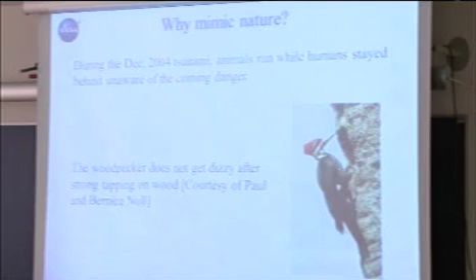Some animals have a sense that something is going on, that they better run to high places, and those survive. So we lost something—we may have had it, but we lost that sense, and we need to build sensors that could help us do what these animals are able to do. We lost something like 200,000 people at that time. Something simple like the woodpecker.

It knocks on wood. Try to knock your head on the wall and see what happens—you get dizzy, and this woodpecker does it for a living. That's how they get food, that's how they build their nest.

The people who hold the jackhammer, everything in their body shakes. If they have dentures that are loose, it flies from their mouth. The woodpecker doesn't have that problem.

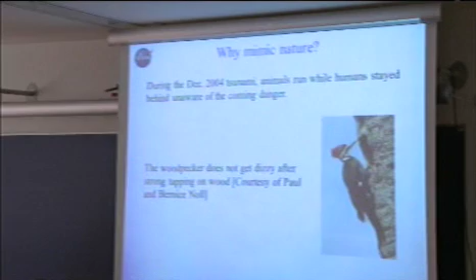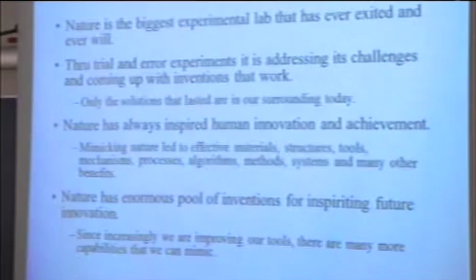So what made nature so capable? Well, it's the biggest lab that ever existed and ever exists, because there's a lot of trial and error, and only the things that work last and continue to other generations. Of course, it's inspired a lot of things, and this workshop is about that too. There is an incredible pool of invention that nature came up with—why reinvent the wheel? Just sit there, try to understand what it is, and try to copy it.

I'm sure we've seen a lot of examples even in this workshop, but as simple as the honeycomb—it's used in every airplane, not to store honey, but because it is a lightweight and strong structure.

Something else that was copied is body armor—look at the turtle. Of course, the turtle is very slow, and so does the knight with their clothing. But we did, as humans, take things and just improve them all the time.

And today we're using this technology, we call it technology, in a tank. Now they have GPS and all this technology we have, and make it comfortable to sit inside the tank and use it.

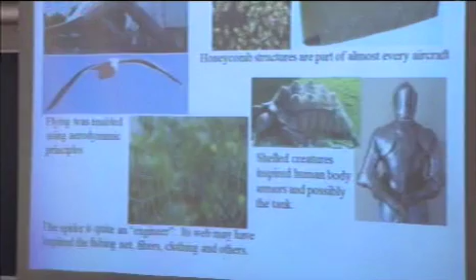And of course, flying—we as humans have seen a lot of insects flying, a lot of birds flying. Even though it seemed like it is so easy for them, it wasn't easy for humans, because people tried to copy that. Just copying didn't work until we did our homework. We learned all the tools and whatever, and now we can fly.

And we beat nature in no time. There's no bird that can fly this fast, no bird that can fly that high and carry this mass, and on and on and on.

And a simple engineer—we have this spider. It's marvelous, it built this web that is just incredibly flat, and you can just be impressed with what it can do.

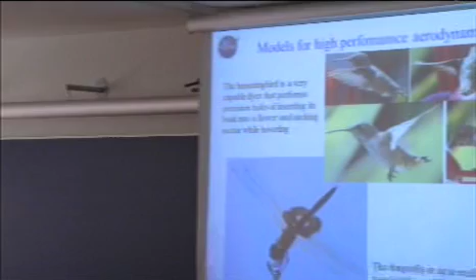Of course, there are a lot of other things that are good challenges—the performance of the hummingbird and the dragonfly, and there are people who are trying to copy it. There's a group not too far from our place in Pasadena that made a little hummingbird that can fly and send videos to a control station.

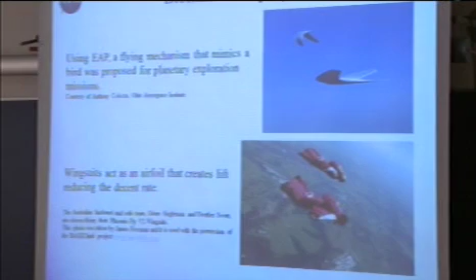But we also have other things we tried in terms of flying, in vision of using electroactive polymers, which is going to be some of the focus of my talk, using it to flap—basically create a plastic wing that flies on different planets.

And we have the thing called, basically it's an airfoil called a wingsuit, that people just jump from high places and, wherever they hit. But the early developers, none of them died old. And you can imagine why.

But look at what the octopus can do that you may be impressed by—what it is doing, you will not be able to do. Look what it did: it took its whole body, squeezed it into a narrow opening, a tube, and just got to the other side. There's nothing robotic with a solid structure that can do this trick.

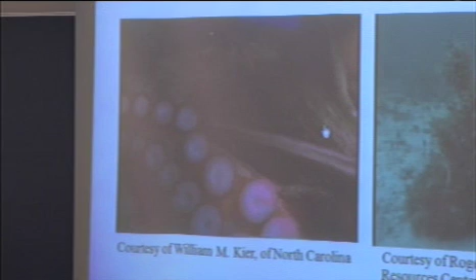There's another trick the octopus is able to do. There's an octopus in this picture, a huge octopus, and it's hidden so well because of its camouflage capability that you don't see it. Look what happened when it noticed that it was on camera. Look at that—if you were a fish, this would be your last day.

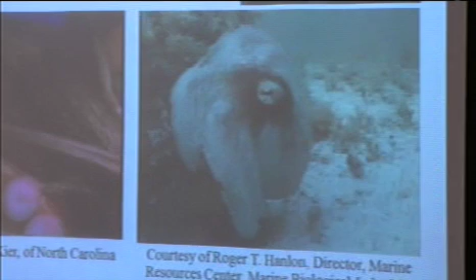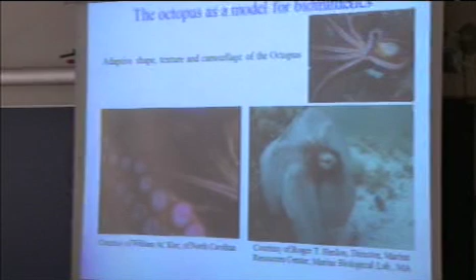And what is amazing about this creature, it is colorblind. It is able to copy everything - the color, the shape, the texture. I was trying to imagine to myself, if I had this capability, how could I tell even what is behind me? That alone, having all this resolution and all this capability, it's amazing. Now we're thinking of the chameleon and the octopus as capable of making this.

Ability to camouflage. Camouflage is used by nature almost everywhere, including plants. We don't think of plants as camouflaging. Let me show you what they do. I noticed, by the way, there's a book coming in two weeks that has this in the introduction chapter.

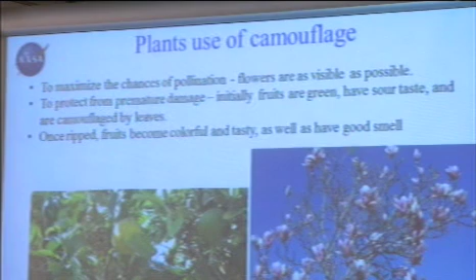I noticed I have a lemon tree. And what is interesting, the fruit stays a long time on the tree. Here I was taking a picture of the fruits, and here's what you notice. Look at what happened - this is the ripe fruit, right? We know the color code, and this is not. When it is green, you don't eat. When it is yellow, you eat. This is what nature coded its fruits.

Most fruits are green. And guess why? Simple - they don't want you to see it. It's too early. Once it's ready, they give it smell, they give it color, they give it everything it can, taste, whatever, so you will eat it, because it's ready.

Another thing interesting - it's important that the flower will be visible. Very important. So what it does, some trees shed the leaves, so the first thing that comes out is the flower, not the leaves. The flower comes out as big as it can be. This is magnolia in my front yard.

And once they are ready to become fruits, guess what happens? Those leaves are not needed anymore for the flowers, and now we have the real leaves. And then what is interesting, if you notice, most of those fruits are even hidden behind green leaves. You can see some of that. So camouflage is...

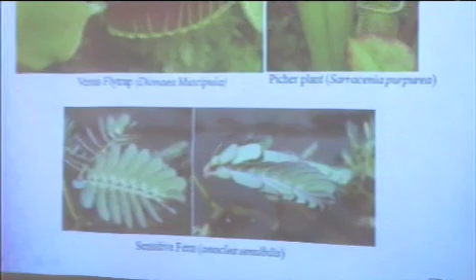Plants do other things too. We don't think of plants as even moving, but they have muscle-like capability. Some of these plants, like the Venus fly trap - a fly goes in, that's it, the door closes, and now it's food. There's also the pitcher plant, same thing - closed door, now food is ready. There is also the fern that when you touch the leaves, they close. It's quite fast, relatively speaking.

Roots of trees are powerful. They can lift curbs, they can lift building structures. This is how powerful they are. So we don't think of plants as capable of doing motion and generating forces here.

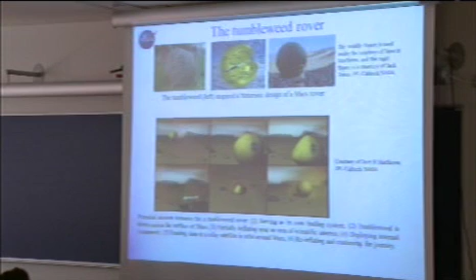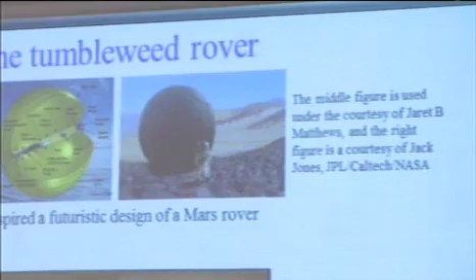And of course, this gives us ideas for biomimetics. The tumbleweed inspired a vehicle for Mars. The idea is to have something like a beach ball. There is a lot of wind on Mars. The atmosphere is not that high, so it is not that much force - you're talking about something like hundredths of our atmosphere, only 6 torr as opposed to 760. But the wind speed is about 24 kilometers per hour - decent, so it can move a beach ball like that.

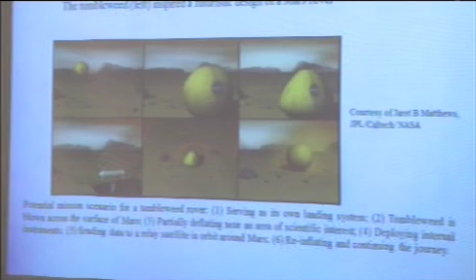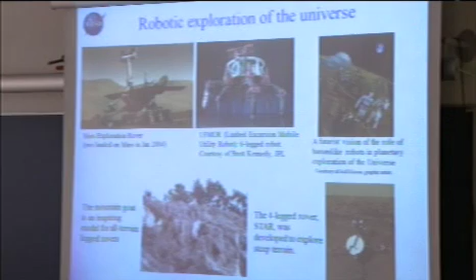More specifically, you're familiar with the Mars rover. We're going to send another one. The new one that's going to be launched in November is called MSL, Mars Science Lab - they may have another name by the time it is launched. It is as huge as a car, weighs about a ton. And when it arrives on Mars in March next year, it will be different than what you've seen before.

There will be a rocket that brings a lander close to the surface, and out of that, the rover will come down with cables, just like a spider. Once it hits the floor, the rover will be released, the cables will go away, and the lander will be launched away, as long as it's clear of where the rover is. Exciting, sounds like science fiction, but that's what it is. Hopefully in the future we'll have walking robots, because we are finding more and more areas like this as opposed to a nice flat area.

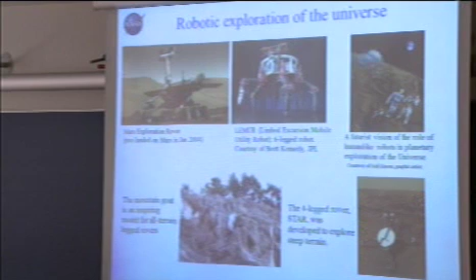We have one of the rovers that since 2003 got stuck in the dunes. I have an illustration where one wheel is outside the sand, the only one that doesn't work, while the rest dug itself into the soil, now so covered with sand it's not working anymore. But after 7 years, with a plan to use it only for 3 months, it's not bad.

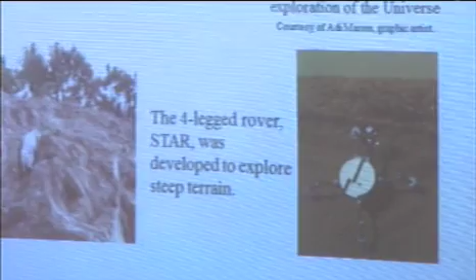But look at what these guys are doing, the mountain goat. This one is already resting up there enjoying the view, and this one is going to get there. We don't have a vehicle that can do this trick, but we're trying to make one. I'm working with another roboticist at JPL on this, and we made all the required foundations, including a drill that requires little force to push into rock, so it basically grips itself as it climbs mountains like that.

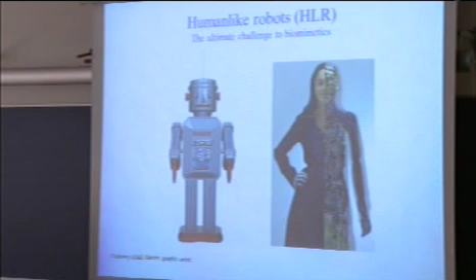That brings us closer to the subject of human-like robots, because it's the most sophisticated capability. When I was young, this used to be the robot we imagined, basically a machine that walked like a toy. Now we are more visionary. Adi Marom is the artist who made a lot of the art I'm going to show, part of a book I published in 2009. The idea is we will eventually have something looking like us that does things we do, or better. The question is, what does it take to make that?

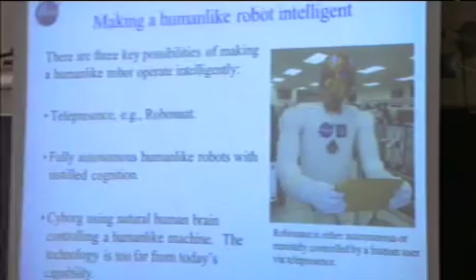We need some intelligence, and this is the robot Ira mentioned. I took this picture at Johnson Space Center. It's a duplicate of what we have now on the space station. This robot can sort mail, it takes an envelope and does it. It was built as a telepresence system, meaning an operator wears a suit with sensors, and the robot mimics the actions of the person. But now they're making it autonomous.

So effectively there are three possibilities for making a robot smart. One is to keep the intelligence with the human and make the robot totally dumb, just copying whatever the human does. The other is to make the robot totally autonomous and smart, but we are far from having our wisdom in it.

This now goes into the mode of becoming as smart as possible. Eventually, I don't know when, but this robot will be demonstrated, or at least tested, for plugging and unplugging things, simple for a human but a big deal for a robot. Turning knobs on and off, strapping and unstrapping, and a whole scenario of things that must work without damaging anything.

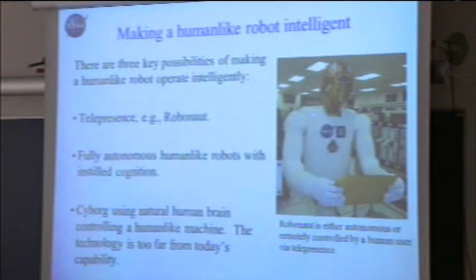And of course the ultimate is, if we start making prosthetics for humans, hands that look very much like a human hand, eventually there could be situations where someone with a deteriorating body but an able mind could have a whole body implant, where the brain is the only thing that represents the person. And now you have a totally smart robot because it has a human brain. Sounds like science fiction for now.

Now, why do we need to do that? What's wrong with a robot like R2-D2 from Star Wars, with a barrel shape and a half-sphere on top that turns like a head? What's wrong with that? We're very comfortable because most of our world is built around our size, the handles, where things are placed, the chairs we sit on. Everything around our world is built for our comfort and size, so might as well make a robot our size, so it will be effective.

Because if you want a robot for your grandma, getting old, who wants help but doesn't want to go to a nursing home, and wants to enjoy herself in her own home, it would be nice to have a robot like that.

Now, why does it have to speak like us? We're very comfortable with verbal communication and facial expressions, we understand that well. You don't want grandma to sit and type 'I want food,' and by the time she types it, she's starving, making mistakes the robot has to interpret. We want simple communication. Increasingly, interfacing with machines is made as simple as possible, like an iPhone, where with your fingers you can do exactly what you want, and it's expanded. Everything is more intuitive and as communicative as possible.

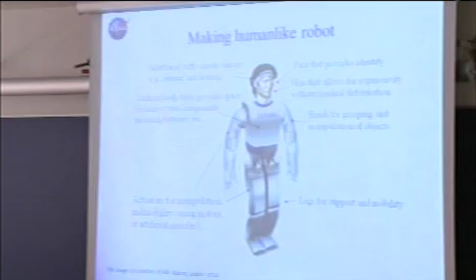That brings us to our days. In writing the book with David Hanson, who is also a roboticist, I came up with this idea of having a figure that represents a human-like robot. Because if I make it totally look human, it's hard to say, yeah, this is a robot. So we chose the body to look machine, and the head to look human.

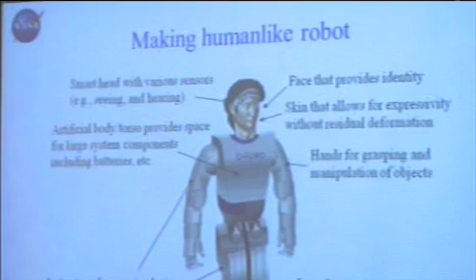You probably have seen this head before. It's David from the Michelangelo statue, that we turned a little bit in color so it will look human. But there is a lot of aspects to this, and this week we heard some, and you're going to hear more, about things that make a robot like that feasible, possible, and operational. I'm going to focus more on what it takes to make the muscles, which is really the weakness we have today. It's still not there, unfortunately.

Now, electroactive polymers that we call artificial muscles, their response, or characteristic of the response, is the closest to look like our muscles. The first person—I published a book in 2001 about that, and I was looking, you know, if you publish a book on the subject that's supposed to cover everything, I was looking to see the history of how did it happen.

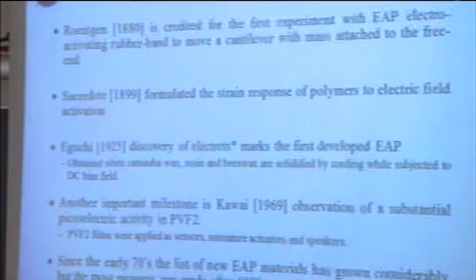And what I found was that Röntgen, the guy who came up with the X-ray, did one more thing that he just didn't know he did. He took a rubber band and hung a mass on it, clamped it with 2 electrodes, and he saw movement. But he didn't realize he was the first to do EAP. He thought it's a thermal effect, so he dropped it, but he reported it. He had a paper in German that he published here.

Then Sacerdote did some modeling, so he's the first theoretician who played with polymers. And then you can see that the milestones are 30 years later, 50 years later, and it's only in the 90s where things started moving significantly. The amazing thing to give credit for: in Japan, in the middle of the 80s to the 90s, they had a major program to look into this material. Most of the work they had done was with gel polymers, but everything was Japan only, kind of thing. The only spin-off that came out was some workshop—there was one workshop that included something like 20 people worldwide who knew about each other in the beginning of the 90s. Okay, but PVDF, which is well known, came in the end of almost 1970.

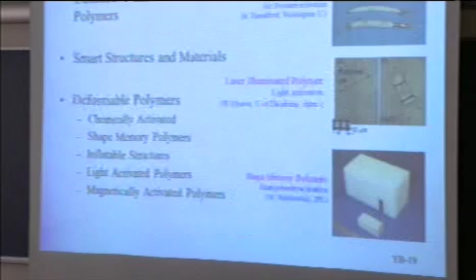Not everything is electroactive, not every polymer. There are others I should mention while we're talking. Some activity is not necessarily mechanical. There is photoactive, and there are also what we call smart structures, using shape memory alloys and other kinds of materials to create actuation of some sort.

Also, there are deformable polymers, like the McKibben muscle. It's just a balloon that inflates and has threaded cloth on it, so that when it expands, it shrinks in length, just like when we do like that. It's never been used in prosthetics because it's too noisy and slow, since it requires pumping air in and out.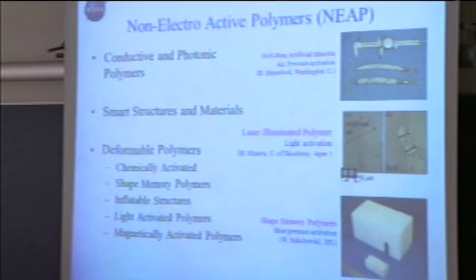There's work using laser activation, but that's on a small scale where you shine a laser and it should contract or expand. There are also polymers called shape memory, where you squeeze a polymer under heat and pressure, and then when you heat it again it expands, and it can grow something like 40 times the size because of its foamy structure.

That brings us to the EAP. I'm an expert in ultrasonics, and at some point in the early 90s, I decided, why don't I expand beyond ultrasonics? I started looking into ideas in smart structures, and a chemist in my building came to me, and I saw an article about...

So I wrote a proposal to NASA to develop artificial muscles. I got the money, $1 million over 3 years. Sure enough, we started working, and it turned out they had made a big mistake, a 10 to the minus 5 order of magnitude mistake.

Nothing moved. I worked with top-notch chemists from NASA Langley who could not reproduce the results. I tried to contact the original researchers to find out, am I wrong or are they wrong? I found out they were wrong. They realized it too, but they didn't want to admit it, and it was very difficult to reach them.

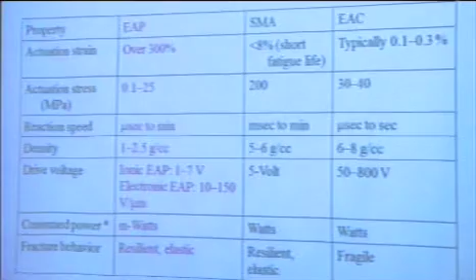Shape memory materials generate high strain of 8%, but you don't want to use that, because if you take a metal and bend it, it breaks in no time, so they try to keep them below 4%. The last one is the electroactive ceramic—those are not so friendly to strain, so they're used in the range you see. Some reach closer to 1%, but the majority are below that.

In terms of force, this one has the highest force, this is the lowest, and sub-medium level. So you have the numbers, you can see them.

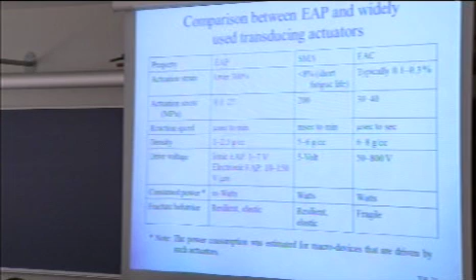What is exciting about these polymer materials is that they are lightweight. For space, it's important because we're trying to save mass—the heavier something, the more energy it takes to bring it to space. And of course, the bigger thing about them is that they are resilient—you can do things like what I'm doing with my hand, freely moving.

Some more accurate or detailed numbers you can see here. I'm not going to go over the details in this short time—you can find it in the literature. But let's see how it looks like when it moves.

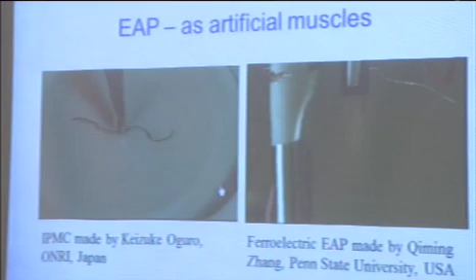Here's an example—this specific one is IPMC. Everything is immersed in water, and you see it moving, and it looks alive. This is, of course, not a tweezer—these are electrodes holding it. And this is like a starfish. It looks alive—find me another material that does that.

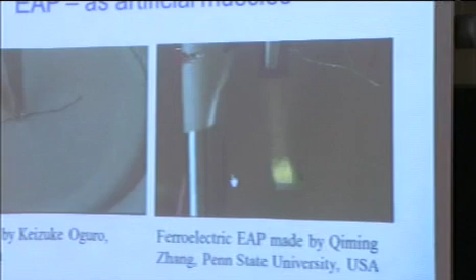The next one next to it is a ferroelectric EAP, basically like a piezo. The way it was made to bend like that is to use what we call a bimorph—taking a film that is active and bonding it to a passive one, so when one stretches, it creates a bending effect. Otherwise it just... Now, most of the ionic type are made to bend, as opposed to the ones we call the electronic ones.

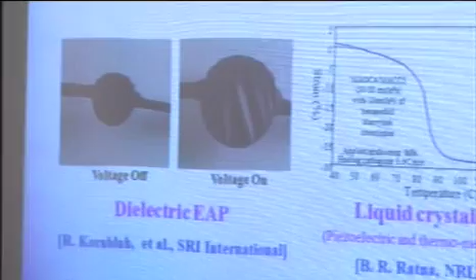Here are some examples of those, and if you remember, I mentioned what SRI have done—this is what they have done, see it in action, it's really impressive. Here is another example—someone from Korea even took those tapes that have metal on one side, glued two of them so the metal served as an electrode, and showed that they have an electroactive effect to some extent.

The EAPs we are seeing here, or at least the electronic ones, all of them stretch. The contraction is in the thickness, because you need as thin a material as possible so you can get the electric field that is needed.

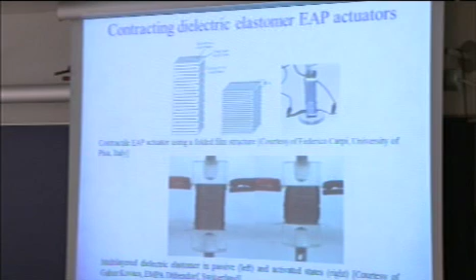So in order to get contraction, different people came up with different ideas. One is Federico—he spoke here last week—he came up with the idea of folding a set of strips to create contraction, because the thickness contracts. And someone from a group in Switzerland, from EMPA—Gabor is one of the lead researchers there—they just took thin films and created a stack, which those familiar with piezo will recognize, that's what they do in piezoelectric material. They create stacks.

As opposed to piezos, where it's much easier to create those thin films uniformly, this is much harder. They're trying to make a machine that will produce this uniformly, and they're still having issues.

But I've seen a demonstration. It's impressive that it's able to contract and lift significant mass.

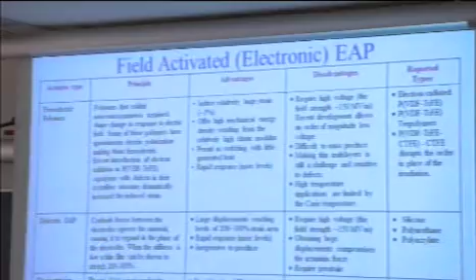I'm not going to go through all the details, but as you can imagine, we don't have one winner material that has everything and is perfect. Everything has advantages and disadvantages, and we need to know the principles. So when I say EAP, it's not just one material—we have to be specific about what it is. But having disadvantages is not a disaster.

It's important to know, if you're an engineer, if you don't know the disadvantages, you design and you will fail because you didn't know.

Here's an example: electricity. If you take a nail and stick it into one of the plugs, one of them will kill you. That doesn't make it bad. If you are careful, if you know how to avoid it and take all the safety precautions needed, and you don't do something stupid like that, then you enjoy all these things that electricity gives us.

Same thing about EAP. Some of them, if you prepare them—this is chemistry—when you prepare them, you have to be careful and take it into account. So you need to know the disadvantages.

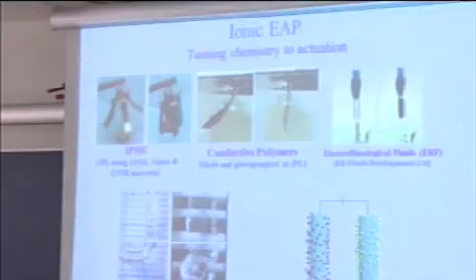I'm going to show a summary of those tables. This is just intended to show that there is a lot of information about it. And here is the ionic polymer—again, a whole list. But just in summary, so you'll have an idea of what kind of advantages.

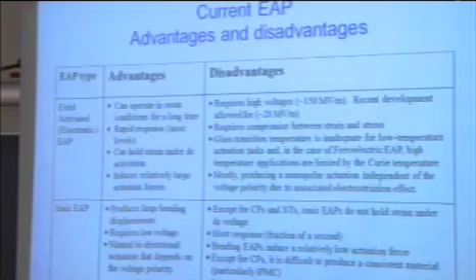So what we call the electronic or electric field activated EAPs, the advantage is they operate dry. You don't have to worry about operating them in room temperature, in room conditions. They are fast—faster than the ionic ones. They operate up to 1 kilohertz.

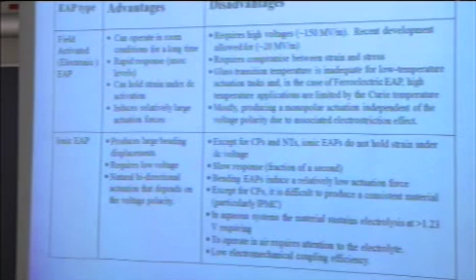This is important for robotics. If I put the position like that, I don't have to feed it with power—it stays there, okay? And it creates large force. So if you need large force, this is the way to go.

However, there are issues. The voltage is high, and there is no magic around it. Maybe the idea—that's what EMPA is trying to do by using thin layers. This way, that's how you reduce the voltage. And that's what they do in piezo, as I mentioned.

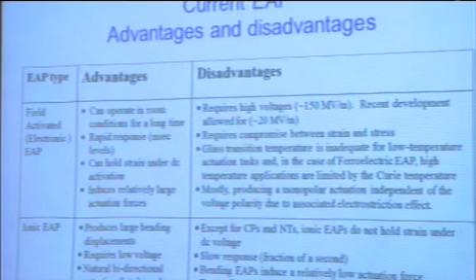They require a compromise of force and strain. If you have high strain, you compromise to get more force and so on, so you can balance. Glass transition is an issue when you go to low temperatures, and it's a problem with all polymers. At low temperatures, it's an issue.

They mostly produce—this is also an issue, but you could deal with it—one polarity, because it's related to the voltage squared. So no matter what voltage you use, it always bends in the same direction. So it's something you need to take into account.

The ionic ones create mostly bending displacement. They don't have that much torque or bending force.

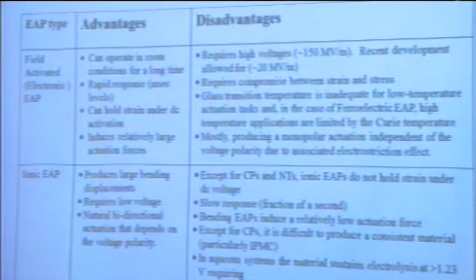The advantage is it requires low voltage, something at 1 volt. You can drive them with a simple battery, and they are bidirectional. But the weaknesses are: most of them do not hold position.

This is chemistry in action. DC creates movement of ions, so they keep moving. You put it under DC and they can do things like fold on themselves and so on. Slow response—the bending is low force.

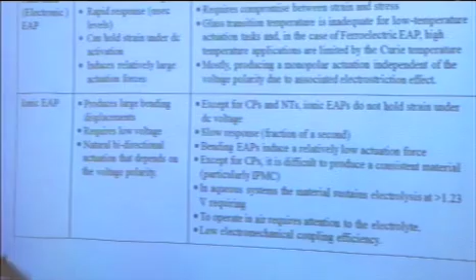And operating in air is a big deal—they dry out in air. When I started working with it, I used to get material from New Mexico, and at one time I went to show it as a demo at a review, an internal review at JPL.

It worked when I left the lab. Trying to check it before I was supposed to make the presentation, it doesn't move. At that time, I realized I have to take that into account, and I didn't think about it. I'm not a chemist—you give a material, you think of it as a mechanical device. So that's what happened. Anyway, the efficiency is also low.

Okay, some examples.

Once I got the funding, once I had this contract, it's important to have something useful when you bring chemistry, and I was funded by NASA's robotics program, so you have to show something robotic. If you tell them that you mix this with this, no one gives a damn.

So I came up with an idea of making a windshield wiper, because there was a tiny rover that was supposed to land on an asteroid. The idea was to throw a detonator onto that body, and all the dust would fly, so when the rover lands, it will be a pristine surface, never exposed to UV and all these bad things from meteorites and whatever hit the surface.

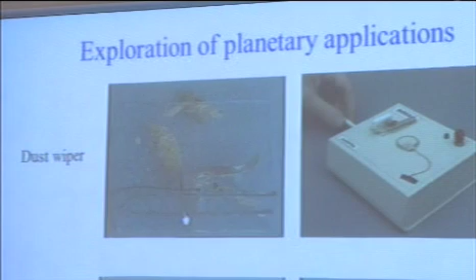So here is a windshield wiper that I came up with. It moves and bends, and I got excited about it, everyone got excited. But then I started looking into specs, because if I want to design it for a mission, it's important to have specs. And if you look, there is some leftover dust. I asked how small this leftover can be, and I was told sub-microns. So I cannot use that simply as is.

So I came up with this version that uses electric field repulsion, a brush made of fiberglass. The electrodes are basically coated almost to the tip, leaving a gap. And with 1500 volts, the dust flies because it's repelled. You can see the dust flying. Basically it was part of the mission, it was supposed to fly, but the mission was canceled. That's what happened.

Then in parallel, I was looking at robotic ideas, and this is one I came up with, because if we're starting to collect samples from planets, it would be nice to have a hand like this. The films weigh 0.2 grams and only use 0.1 watt, which is effectively almost nothing compared to other instruments, and you can see how nicely it can grab things. I even came up with a robotic hand. Here was IPMC, and this one is dielectric elastomer that allows you to raise and lower the arm so it will work like a robotic arm.

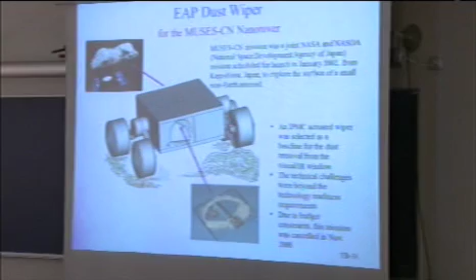And this is the rover I was talking about. It basically was supposed to serve as a windshield wiper. So following this funding from NASA, I got funding from DARPA, and it was more about looking at the whole field rather than using EAP for robotics specifically.

So this is what I came up with for looking at the field as a broad topic. We have the materials we knew, and we still don't have new materials since then, by the way. The only thing we have is improvement. We have the two groups, ionic and electronic. And as I said, I'm looking at it as a marathon race - what obstacles do they have to run through?

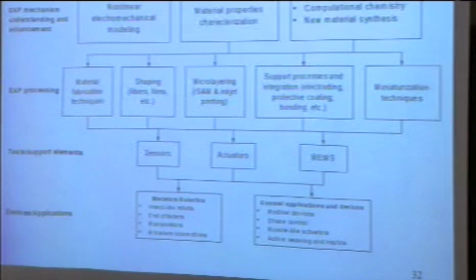Good science and engineering. So good science, we're talking about nonlinear mechanics. You're not talking about infinitesimal displacement, we want full displacement, a big full level. We have characterization of the material, and performance is a big deal - you cannot put a strain gauge on it, the strain gauge will make it not move. Something like computational chemistry needs to come into place so that we can predict what materials will be there rather than mix and find out.

Here's fabrication engineering - how to fabricate materials, how to make shapes, how to coat them. All those things are problems. One of the guys made an EAP from gel that expands 100%, but he was only able to do this experiment once, because the electrode fell apart. It's funny - one picture was made with a scale of centimeters, and the other one with inches. But he couldn't repeat the experiment because everything fell apart, and it took him a long time just to make this experiment.

So once we have that established, even miniaturization capabilities, we can make sensors, actuators, applications, and so on. So that brings us to more details - what I showed earlier, this is the infrastructure we want. So far, not much work has been done in this area.

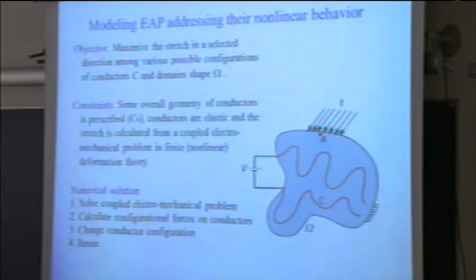A lot of understanding and improvement since then. And of course, fabrication - people are already using inkjet printing technology, whichever is used in printers, to create those EAPs. It's amazing how effective this inkjet technology is. They take two streams of drops flying, and they merge and create a combined drop. This is how accurate everything is. And of course, we know that because you see the marvelous pictures you can create with an inkjet printer.

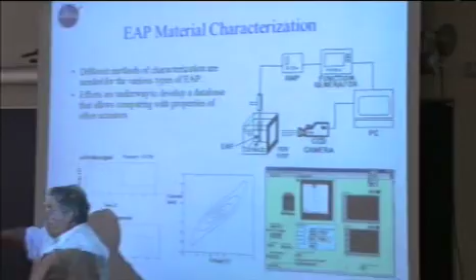Again, how do we make the measurements? We ended up using a video camera to watch the movement, and in order to create load, we hang a mass at the tip of the film as it is moving. There are a lot of properties we have to track, because now it's not enough to look at the electrical or the mechanical alone - we also have to look at the combination, the couplings.

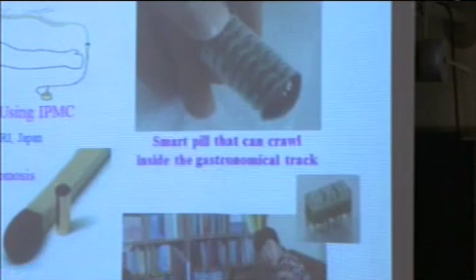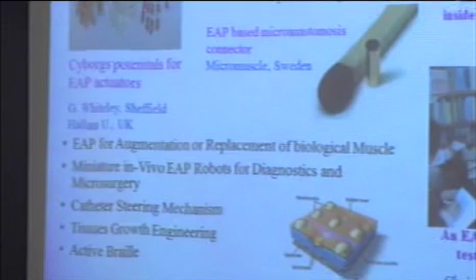There's also some work done on Braille ideas - there are something like 9 groups worldwide. I started this idea because I saw some blind people in Washington one time, and came up with an idea of having electrodes like this - a strip on one side one way, a strip the other way, and you can individually address whichever pin you want by activating that individual crossing.

I put it in the book I published in 2001, and since then people have moved the field forward. Just a comment while we're on the subject of Braille - Napoleon is somehow tied to it, because he asked his engineering corps to develop a method of communicating at night, and one of his officers developed a 12-pin code. They wanted to teach the soldiers to use it at night, but they hated it, so they ended up taking it out of the military.

They didn't want to use it, so he went to an exhibition, a workshop in Paris, where blind people attended, including the principal of a school for the blind. They talked about giving his code to the blind people. One of the students chosen was Braille. This kid thought of ideas to improve it, cutting from 12 to 6 pins, 2 rows of 3, and the officer felt this blind high school kid will tell me what to do. Guess what happened? This blind kid became the most famous person, as opposed to the officer. He wrote a book after he finished high school, wrote it in his own code, and of course now it's well known that he is the guy who came up with the code.

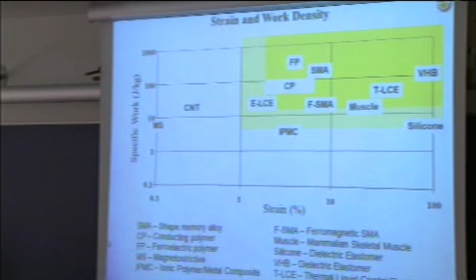So we have materials that can beat muscles in work density and strain performance. That brings us to the comparison with muscles.

Considering the low actuation force of current EAPs, a challenge was posed to the science and engineering communities: develop an EAP-actuated robotic arm capable of winning an arm wrestling match against a human opponent. I posed this challenge when I started the conference in 1999.

Sure enough, in 2004 things started rolling faster than I thought. First, I got contact from Marvin Cohen, one of the directors of the movie 'Over the Top' with Sylvester Stallone, that supposedly someone worked for a living arm wrestling. He wanted to see the wrestling match. I said, look, we don't have a wrestling match.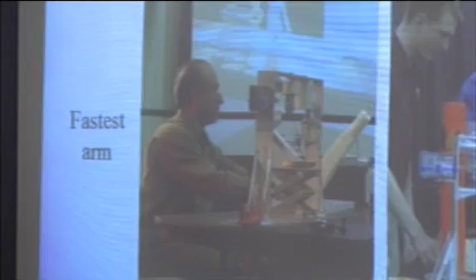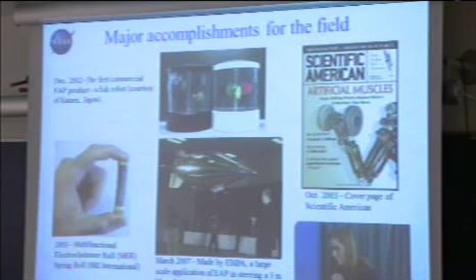She won again, but at least this time we had numbers, and they are two orders of magnitude faster and stronger than what we had in 2006. Since that time, we did not have competition, and it's really unfortunate because they think of a human as the object of wrestling rather than comparing to that year. I prefer incremental improvement until we reach that point. We're not going to reach it in one day, but hopefully one day we'll beat a human, though it will take a while.

In the meantime, we have quite a bit of development. The group from EMPA developed this blimp that has steering, with controlled fins. It was a cover page of Scientific American in 2003. There is a commercial product that came out around 2001 or 2002 from a group in Japan.

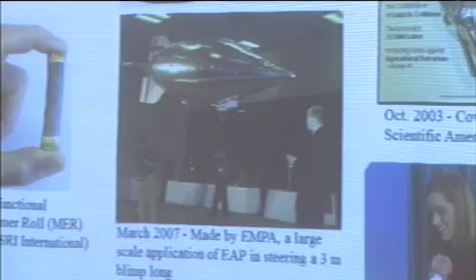Let's see that. What it is, is a fish in an aquarium. It costs $200 a piece. You don't need to feed it. All you need is water in the tank, because it's driven by a coil inside the body of the fish, inductively fed from the top and bottom. I'm not sure how they made the buoyancy and control work, but it seemed interesting from the videos I've seen. It didn't hit anything and was comfortably swimming inside.

I saw those fish. I was in Japan at a place where they did show it, and they're about this big. I tried to take a picture, and these guys are very much trained that when they see a camera, they jump in front of you and say, don't even think about it. So anyway, here's the fish, and you cannot buy it if you're not in Japan.

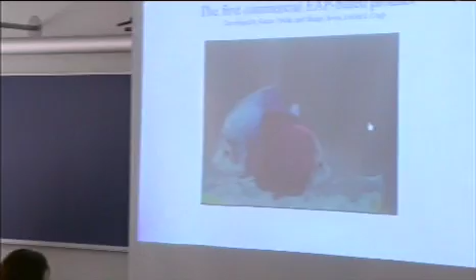Here's another evolution of the development. The group from EMPA made this blimp that wagged the body. People have been doing some work with fish here. This is what these guys have done. Evolution did not develop a fish that flies like that, because none of our animals have helium in their body, but in a balloon like that, you could do that. So it wagged the body and wagged the tail, and basically propelled itself this way.

In terms of development, I got some data statistics from GM, General Motors, because they're looking into making use of EAP, and here is fascinating data. The purple is patents documented for use of piezo. What you notice is that there is saturation, and this is 2005 data. The data I've seen in 2007, though I don't have a copy, already shows decline of that level. The brownish color is the EAP, and it keeps going, basically starting to reach parity with piezos in terms of patents coming out.

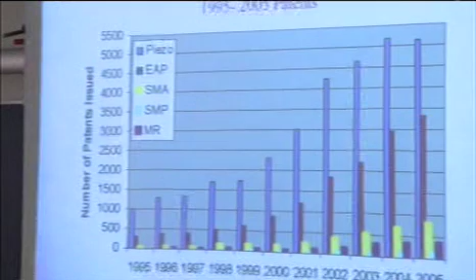What's that? What are SMP and MR? SMA, shape memory alloys. SMP, shape memory polymers. MR is magnetorheological liquids. There's so much I could cover, but these are liquids that, when subjected to a magnetic field, because they contain magnetic powder, become very viscous. There's also electrorheological, which responds to an electric field. All Cadillac cars have this fluid in them, with incredible performance — they control the viscosity, not the density, of the shock absorber using this material. So all the cars, and more high-performance cars, have this liquid in them. It's a fluid.

That brings us back to the bigger picture of the robots. David made this face, and it's supposed to be a platform for people who develop EAP. Because I don't believe someone who says 'I have material with incredible muscle potential' unless they can try it. If anyone has such material, here in my lab I have this head, and we can try and see if it works.

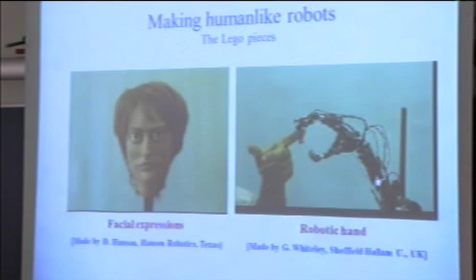Also, we have this robotic hand that Graham Whitley made. If you saw the picture earlier of it holding wine — he now works at a company that makes prosthetics. At the time, he was doing his PhD when he made this robotic hand.

To some extent, we think we are smarter than robots and more capable than robots. And what makes us unique is that we express emotion and we can feel emotions. Let me show you that robots do have emotions.

Nice robot. You're such a cute little robot. You're so serious.

Moving forward, now of course we are more capable, more sophisticated, so David Hanson made this Einstein head that is able to make facial expressions. He made it in honor of the relativity theory in 2005, and it was presented at the meeting of heads of state in Korea. I'll show it in a minute.

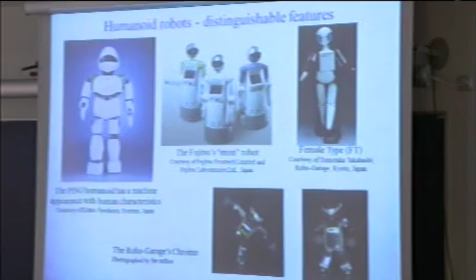This robot, they're using them in shopping centers. If the robot sees someone looking at a map, it comes and asks, may I help you? And if the person asks where is whatever, it takes you to that store, prints coupons for you, and tells you all about what the store sells, so you will be encouraged to buy things.

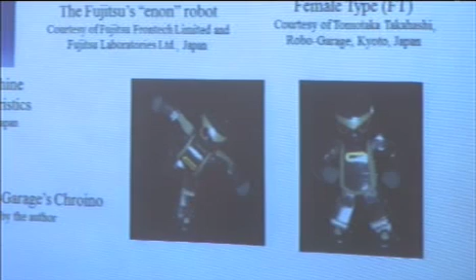This robot is about this big. It's incredible in terms of performance and mechanical movements. I'm going to show it in a minute later again. But the human aspect, the human making, here's...

Hiroshi, he's one of the leaders in this field, made a clone of himself as a robot. If you look carefully, you can tell that this is the robot clone.

This one is from China. I took this photo when I came to LA. There was an exhibition there. And you can see the beauty of the others - I talked already on the cyber receptionist.

And here's the beauty of robots, and you can imagine the kind of application they're thinking of it. You pass in the street and someone asks you, 'robot lady lift the dress,' and you can negotiate price and all those things.

This could be successful - who knows, the internet was developed in that direction initially, and all this paying through the internet was developed that way. But it's incredible beauty - look at the one on the right, it's amazing.

And of course other areas that could be - you want to immortalize yourself, you make yourself cloned into a robot, and years later, 10 generations from now, they want to know what you were thinking, if you were faced with the same problem, if you understand at all when they're talking to you about the technology terminology in those days - but I'm sure they can get updated.

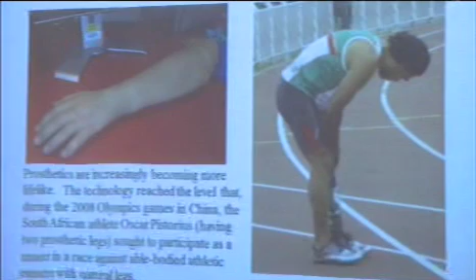David Hanson made this one. That brings us a little bit closer to applications in another area. This is prosthetics made under the DARPA program. They're making prosthetics look so much like human hands, it's unbelievable. When you see the prosthetics of today - that brings me to talking about that.

In 2008, an athlete from South Africa wanted to compete against able human runners with normal healthy legs. He was rejected by IAAF, the international committee that decides who will attend and who will not, because they claimed he has better performance and an advantage over able people, since his legs do not require as much energy as able people's legs when running.

He appealed this rejection and contacted a friend of mine at MIT, Professor Hugh Herr, who is an amputee himself - he was in an avalanche, his legs were cut, and he now has prosthetics. He showed that it is not proven there is an advantage; at most we can say they're equal. Therefore, he was okay to participate. The reason he did not attend is that he did not practice - he was busy with the appeal.

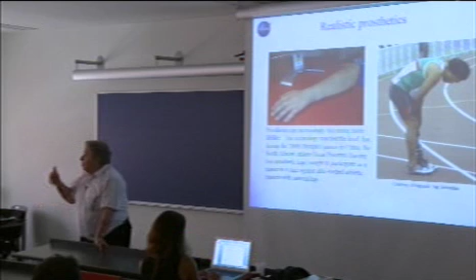When he was trying to be sent from South Africa as a representative, he lost, so he didn't go to the competition. But the fact that we reached this point, that we are not even sure which one is better, that is an important milestone. An airplane beats any bird. Whatever we develop, sooner or later it will be superior to anything else.

Look at the example of those smartphones. I used to have the old stuff, where as soon as the battery dies you have to re-enter everything. Look at what it can do today. I cannot imagine what else can be done, but I imagine there's a lot of smart people thinking what to put back.

Pistorius actually participated in the World Championships just a few weeks back in Korea. He got into the qualifiers for the 400, and he was not selected for the 4x400 team of South Africa because he was not fast enough compared to the others.

But he's competitive, sub-top. The problem is set, it's amazing that we reached that point. And everything could be just better, and we are only in 2011. When we see it, we're getting there.

Other aspect is... how are we doing time-wise? How many more slides do you have? Oh, maybe 4 or something like that.

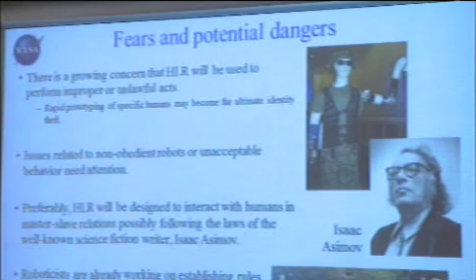$300. Things that we have to worry about, as opposed to buying a TV and you put it home and nothing happens until you turn it on. This thing can cause trouble. If you know Microsoft Windows, if this is programmed that way, just if someone put a virus into it and it started destroying their house, by the time you come and call someone to help you, your house is destroyed. This is a possible nightmare. You don't want even to think about it.

And what if they can do if they're used as soldiers? Wars could start in no time because you don't have to worry about people killed. And of course, another aspect is this: they could demonstrate against us. They want human rights to human-like robots. And whatever that means, there's a lot of meanings to that.

I have a lot of visitors to my lab, from heads of NASA centers to students. At one time, I had 10-year-old kids who were chosen as an award to visit JPL. They visited my lab, and one of them was looking at my eyes very strangely. I didn't know why. So when everyone left, he came to me and asked me, 'Are you a robot?'

Yeah, it's a shocking question the first time you hear it. Now I'm a little bit more prepared for that. I said, should I pull his leg or tell him the truth? Anyway, I told him no, I'm not a robot, but good question. You never know, 20 years from now. But just having a kid thinking I'm a robot, we are almost there.